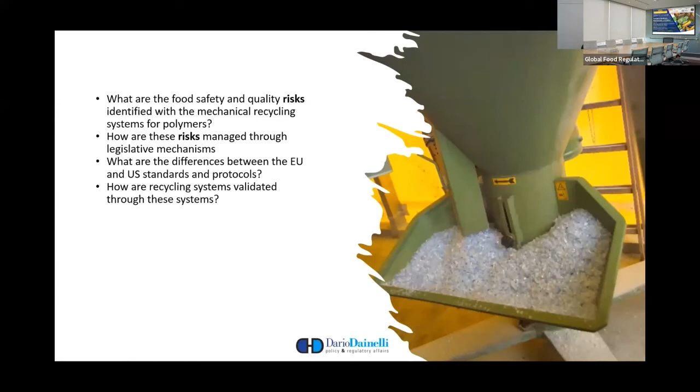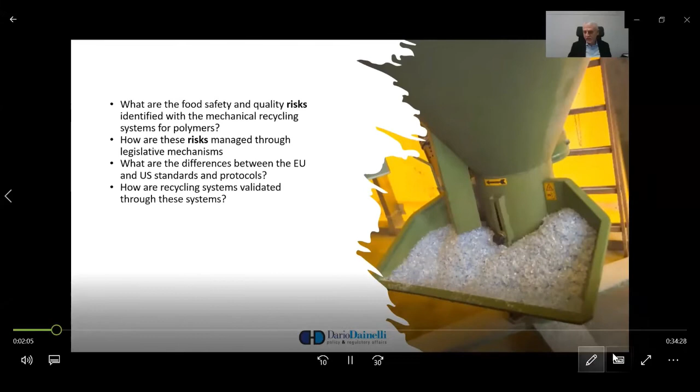I will try to answer some questions during this presentation: what kind of food safety and quality risks might be identified with recycling for polymers, particularly mechanical recycling, which is the most widespread process for polymer recycling; how this risk can be managed through legal mechanisms, and how these legal mechanisms are in place in different jurisdictions across the world; what kind of differences exist between the approaches used in the United States and Europe concerning standards for safety assessment and protocols; and how the recycling systems are validated using these systems.

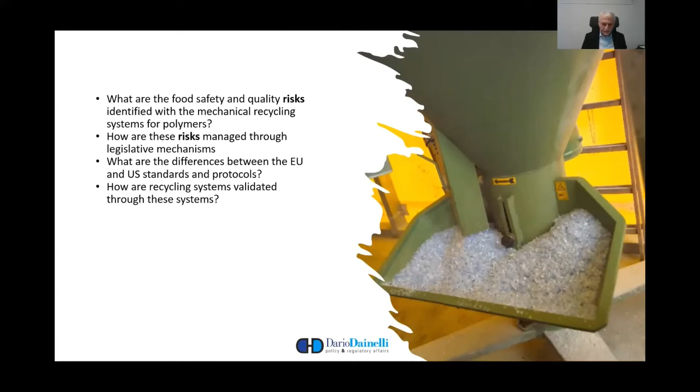But first and foremost, circular economy. The transition towards a circular economy, or a more sustainable economy, has become a priority in many countries, certainly in North America and Europe, but increasingly also in other countries in Asia, like China, and in Africa, Latin America, etc. Circular economy has now become the predominant business model in many fields: transportation, building, automotive, etc.

Plastics have been the subject of an important action plan known in Europe as the Plastic Strategy in 2019. This strategy aims at transforming the way plastic products are designed, produced, used, and recycled in the European Union. Plastics are certainly an important material in our economy and daily lives. However, they might have negative effects on the environment if not properly managed at the end of their service life.

The Plastic Strategy aims at making recycling profitable for businesses through rules on packaging to improve recyclability and increase demand for recycled plastics content, as well as improving separate collection, so curbside collection of plastic waste.

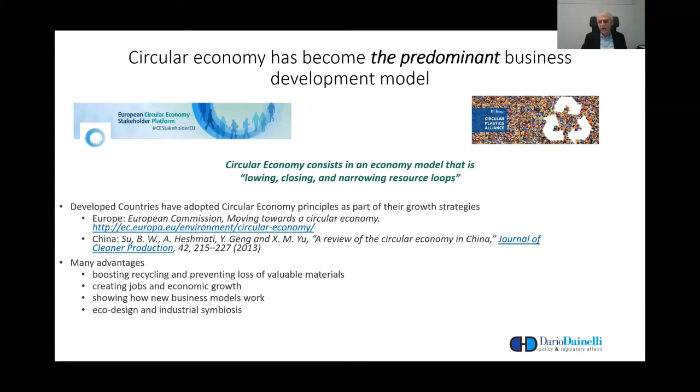It is widely recognized that the consumption of resources of our planet cannot be indefinite, and that the economic growth made possible so far by the intensive use of oil, mineral, water, forest, and other resources that cannot be replaced is now close to a downturn. Circularity in economic growth is already a reality and will certainly become more and more important, a strong driver for the future economy.

It is impressive how things have changed rapidly in the last decade, as public opinion's awareness has enormously increased towards environmental themes, and support for environmental activists has literally boomed. Organizations such as Greenpeace, WWF, the Ellen MacArthur Foundation, and others now have wide support and are often partnering with governmental organizations for the implementation of strong initiatives with very high impact on business and society at large.

Many policies fostering circularity of plastics have been adopted on a global basis. For example, the European Union set challenging targets for plastics: 50% recycling for total plastics by 2025 and 55% by 2030, and incorporation of recycled PET in beverage bottles of 25% by 2025 and 30% by 2030. In addition, it is requested to collect 77% of PET bottles by 2025 and 90% by 2029.

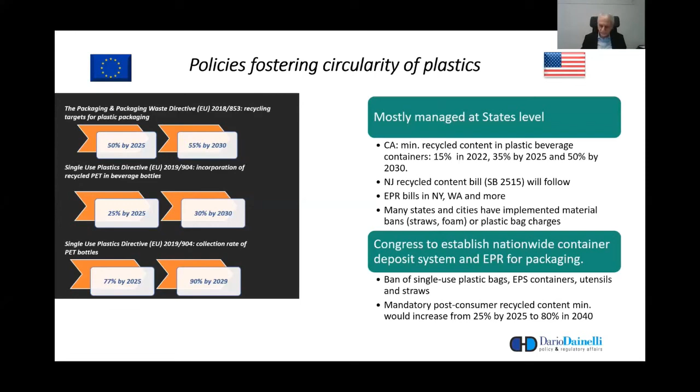However, there are several challenges due to the presence of contaminants in the post-consumer plastic waste stream, which makes post-consumer waste recycling more critical, particularly when used in food contact applications. The main contaminants originate from the packaged food itself, such as limonene from beverages, oils, fats, and aromas, which might be absorbed in the plastic.

There is also incidental contamination from misuse, for example storage of solvents, fuels, or other liquids in the bottle. Some non-food contact containers might also be a source of contaminants: lindane from shampoos, methyl salicylate from cosmetics and other solvents, degradation products, and additives.

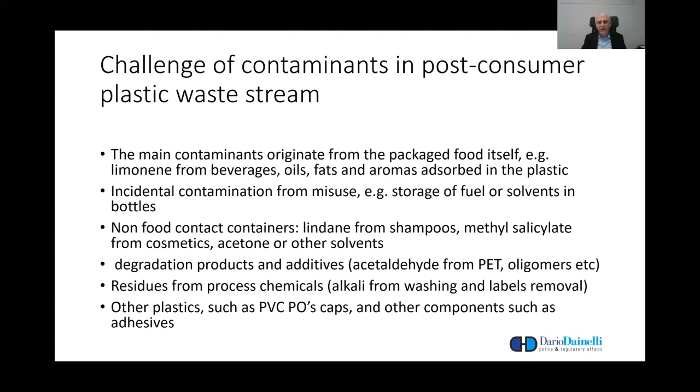A typical degradation product from PET is acetaldehyde, but you might also have oligomers in all kinds of plastics, particularly polyolefins. There might be residues from chemicals used in the process, such as alkali from washing and label removal, and other plastics which might taint the stream to be recycled. For example, in PET recycling, the presence of PVC, polyolefin caps, and other components such as adhesives can be, and in fact are, detrimental to the quality of the stream.

PET has a high melting temperature, over 250 degrees, which means one can heat it up and volatiles are easily stripped so they won't be found in the final recycled plastic. On the other hand, as temperature rises to strip out volatiles, impurities and contaminants might decompose, causing problems such as spots, color changes, burns, and other undesired contamination.

That's why high purity is needed in the input stream, and the best collection leads to the best quality of the final RPET.

PET, unlike polyolefins, is produced via polycondensation. That means it can be depolymerized by temperature and also by solvents, and subsequently repolymerized. This leads to another form of recycling, not fully discussed in this presentation, which is chemical recycling. It is equally safe, mainly, but less frequent because it is less economically sound.

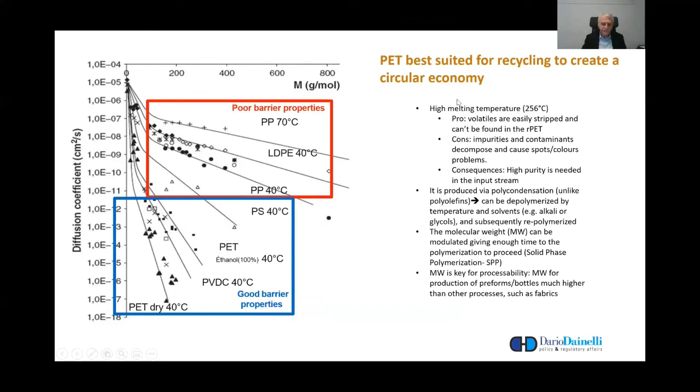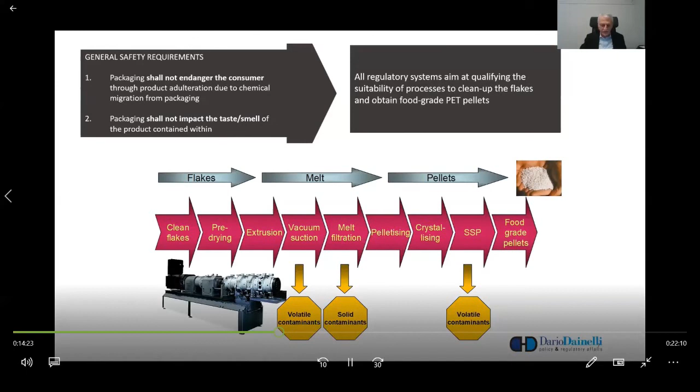This statement is taken from European Regulation 1935/2004, which sets the general requirements for all food contact materials. With minimal differences, this statement is adopted virtually in all countries that have regulations on food contact.

For RPET, all existing regulatory systems aim at qualifying the suitability of processes used to clean up the flakes and obtain food-grade PET pellets. These systems are focused on the process and not on the product, because the process must be demonstrated suitable no matter the quality of the input material.

Obviously, the quality of the input material is important, but within a certain range of contamination, the efficiency of the process in the removal of contamination is what the regulatory agencies have interest in determining. A scheme for the core decontamination process is also reported here at the bottom of the slide, which is in fact very general, but common to all decontamination technologies.

You can see how the decontamination takes place at several different points on the line, in melt, and also at the level of the production of the pellet.

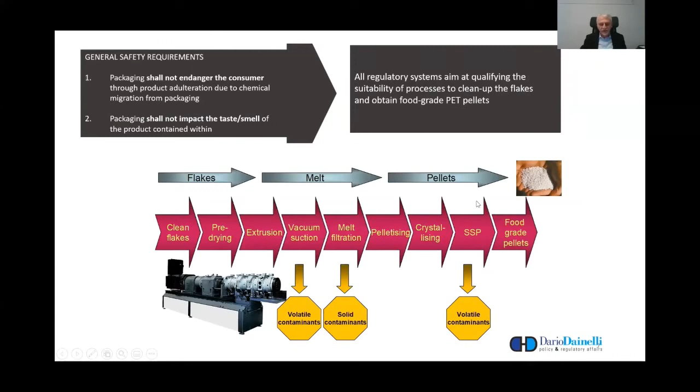Now the question you might have is, how do I prove that the process has the capability to clean up chemical contamination, regardless of the chemical nature and quantity of the substance that might have entered the polymer, and no matter their concentration? This is the question that stands at the core of the overall decontamination process, and even more at the core of the application that recycling companies have to file to either the European Food Safety Agency or to FDA for the risk assessment of their process.

The answer resides in the so-called challenge test, which is a test designed to demonstrate and measure the cleaning ability of the process.

The challenge test consists of spiking clean virgin material with a known amount of specific substances referred to as surrogate contaminants, in a quantity typically ranging between 500 to 1,000 ppm.

Then the spiked materials are put into the process itself, and one analyzes the level of spiked substances in the output material. This quantity in the output material determines the residue concentration, which is a function of the molecular weight and the volatility of the surrogate contaminants.

Controlling this residue concentration allows control and optimization of the process conditions. Finally, the level of these spiked substances shows the ability of the process to reduce contamination, and this is the parameter used by risk assessors to define potential restrictions on the use of the material.

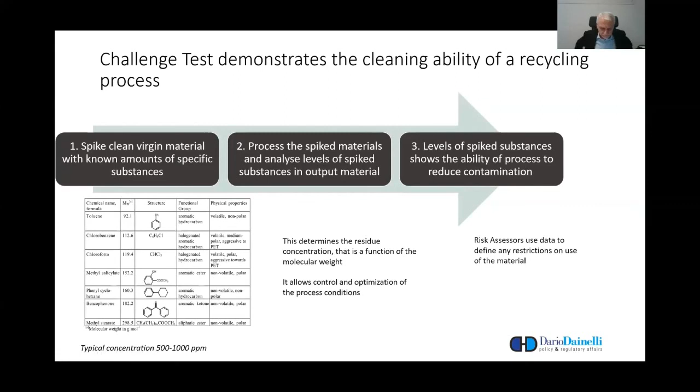There are, as I said, two main systems of risk assessment and authorization of recycled plastics: the US and Europe.

US FDA has approved recycling plants since 1991 and has now approved 181 grades. There's probably a bit more now. This data is from 2021.

The US system is conceived to address all kinds of plastics, although PET is the majority, but it also includes polymers other than PET, such as high-density polyethylene and in some cases polystyrene. For this reason, it can be considered a bit more flexible than the European system.

The EU system is in principle also made for all plastics, but in practice, the way risk assessment is made by EFSA is applicable only to PET. In fact, with very few exceptions, all of these 240 recycling plants assessed by EFSA are 99% plants dealing with rPET.

We don't have a lot of time to go into the details of the risk assessment procedures, but if you are interested, you can email me and we can discuss offline.

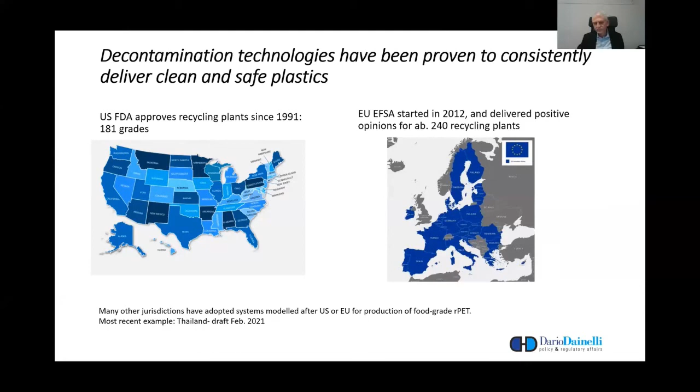In the next slide, I show the comparison between the American and European authorization systems. Well, authorization is probably not the right word—certainly the assessment system. FDA issues a letter of no objection upon application of an applicant, whilst the European Union has a more complex legislation, which is going to change because a new draft legislation has been presented by the European Commission in December 2021.

In the European system, the European Food Safety Authority makes a risk assessment, and this risk assessment has to be adopted by the Commission and translated into a risk management action known as a Commission decision. But these are only administrative details.

Do not be misled by the fact that the US has a voluntary system. So the system in the US is voluntary, in fact. But even the FDA pre-market notifications for virgin polymers is not mandatory at FDA. To understand this, we should go into the legal construction of US law, but as a takeaway message, you should notice that all operators who want to produce or use recycled plastics in the US actually go to FDA and obtain a letter of no objection.

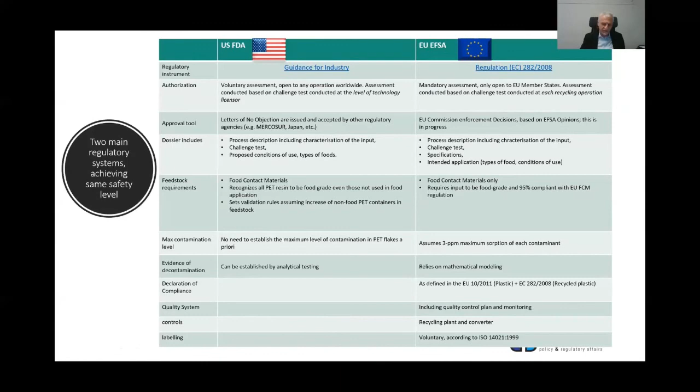So the EU approach consists of a general strategy based on a regulation called 282/2008. This is pretty old—about 14 years ago. And as I said, this law is going to change. The new draft is being presented, and within 2022 the new draft will most likely be adopted.

These systems enable direct food contact use of post-consumer plastics. The recycled plastics should comply with the regulations for virgin food contact plastics, which is the regulation called 10/2011. Recycled plastics in the inner layer of an ABA structure are excluded from the legislation. Although this is under discussion, it is not clear at this point whether this will last also in the new system.

As I said, the process of recycling is subject to the EFSA opinion and the Commission authorization. So we have more than 200 opinions delivered, almost all related to PET.

This slide is a very short presentation of how EFSA approaches the risk assessment for recycled plastics. EFSA, the European Food Safety Agency, starts from a reference contamination level of flakes, considered a maximum of 3 milligrams per kilo PET. This was measured back in the 90s with a project that examined the contamination of several thousand different bottles across different countries.

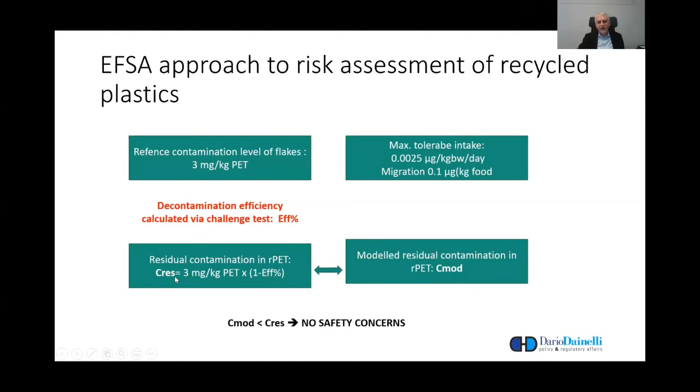When the model concentration is lower than the residue concentration, EFSA considers there to be an absence of safety concern. If this is reversed, then there is a safety concern. As you can see, the starting point is PET. So anything different from PET would have problems being assessed by EFSA because of a lack of any system to calculate the residue concentration. Therefore, this system applies almost entirely to PET.

I will not go into detail here, but since no maximum concentration exists for other polymers such as HDPE, polypropylene, etc., the calculation is not possible. Therefore, applications involving recycled polyethylene either fail or are put on hold.

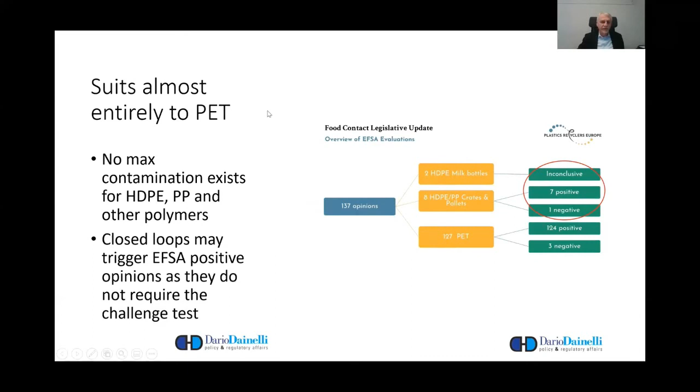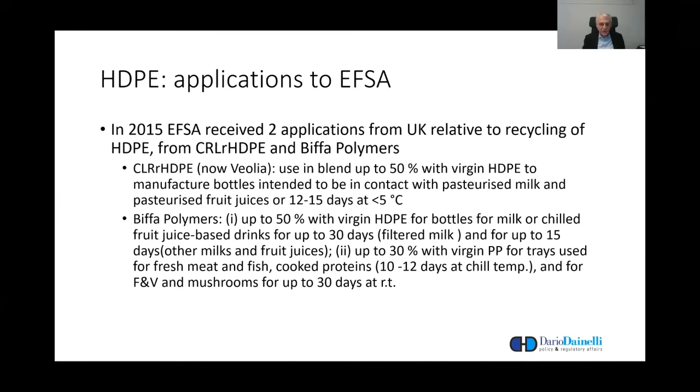This is, for example, the case of an HDPE application received by EFSA in 2015 concerning high-density polyethylene used in dairy and milk products in the United Kingdom. In 2015, EFSA received two applications from the UK relative to the recycling of HDPE for different uses. You can see here, without getting into detail, how deep the analysis was to select the field and scope of application for this recycled polyethylene.

However, the challenge test that was produced was executed with conventional methods for PET, in the absence of other methods, which resulted in a residue concentration lower than the model concentration. Therefore, EFSA's conclusion was that this method is unsuitable to determine safety. As a consequence, these two recycling processes for HDPE were put on hold in 2015, and they are still on hold.

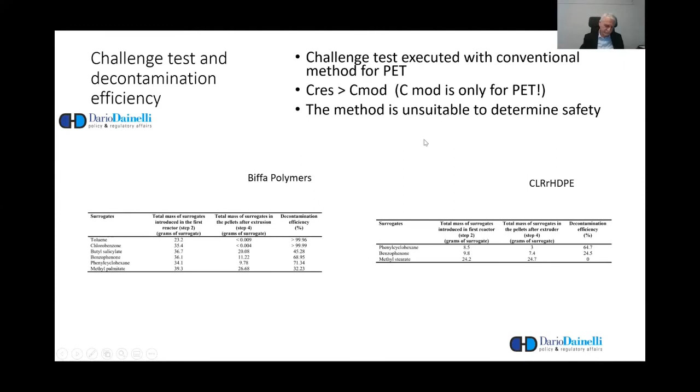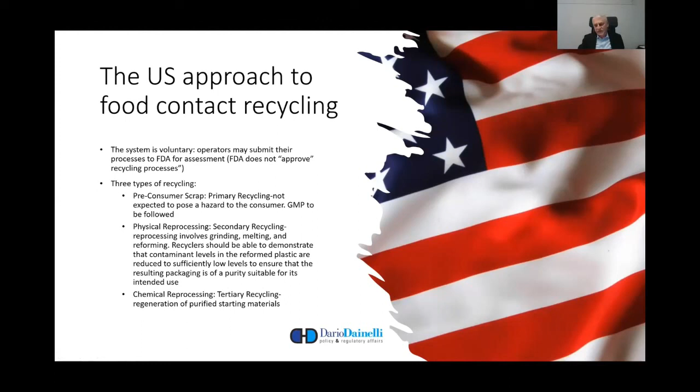The so-called physical reprocessing corresponds to secondary recycling, dealing with mechanical recycling, grinding, melting, and reforming. This also has to be demonstrated as safe by means of a challenge test. Third is chemical reprocessing or tertiary recycling, which is regeneration of purified starting materials, also considered of no concern. So eventually, the system in the US, the letter of no objection, only deals with physical reprocessing or secondary recycling.

FDA has approved recycling processes for a long time, and there is a system quite similar to the one in Europe. Recyclers must submit an application describing the input material, the process of decontamination, results of the challenge test, and so on. They have to demonstrate that the maximum concentration does not exceed the maximum acceptable level of contaminants. FDA issues a letter of no objection, and if a different technology is put on the market, it requires a separate approval, and a new challenge test is to be produced.

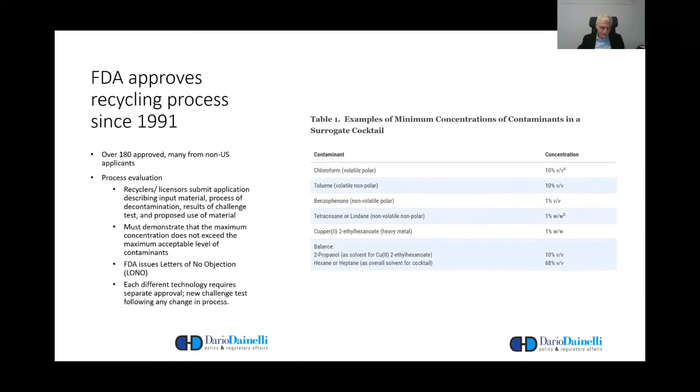The main difference from Europe is in the assessment system. Here you have a starting point consisting of the maximum acceptable level of contaminants in the polymer, which corresponds to the estimated daily intake equal to 1.5 micrograms per person per day. It depends on the type of polymer itself—the density, the thickness, and the quantity of this particular polymer that would be in contact with the daily diet. So you have a calculation made for different polymers.

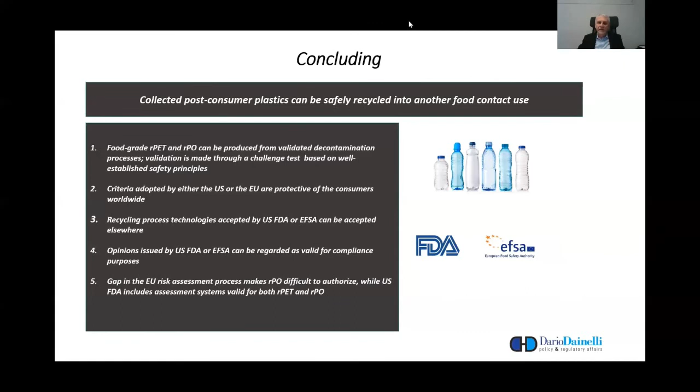As I said, the system in Europe is under revision. Actually, the discussion has been ongoing for quite a long time. We are now close to a change, a modification, and in a few months we will be able to see how the new system will work—hopefully opening the doors for quicker innovation and also making polymers other than polyester easier to be accepted and utilized. This is my last slide.